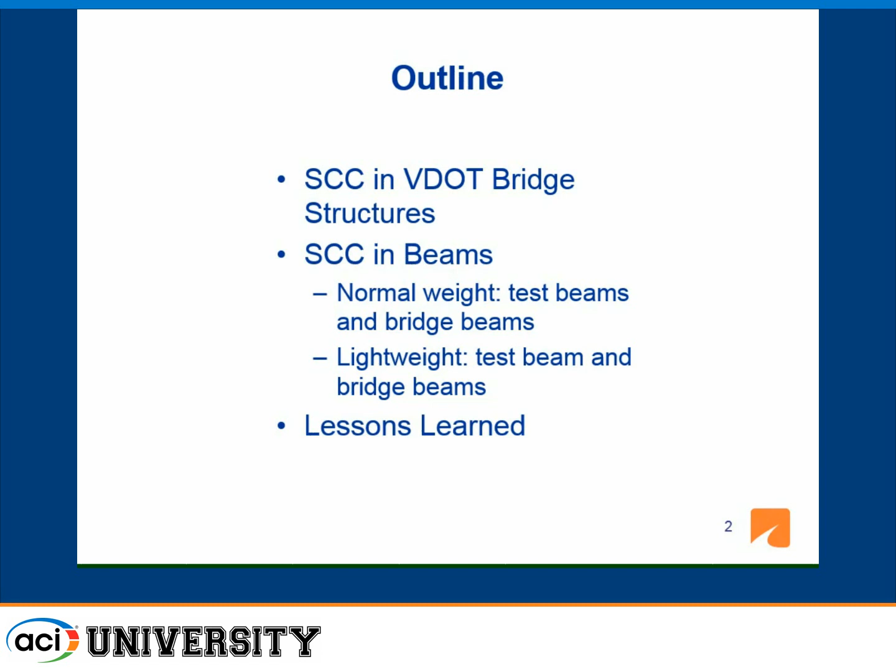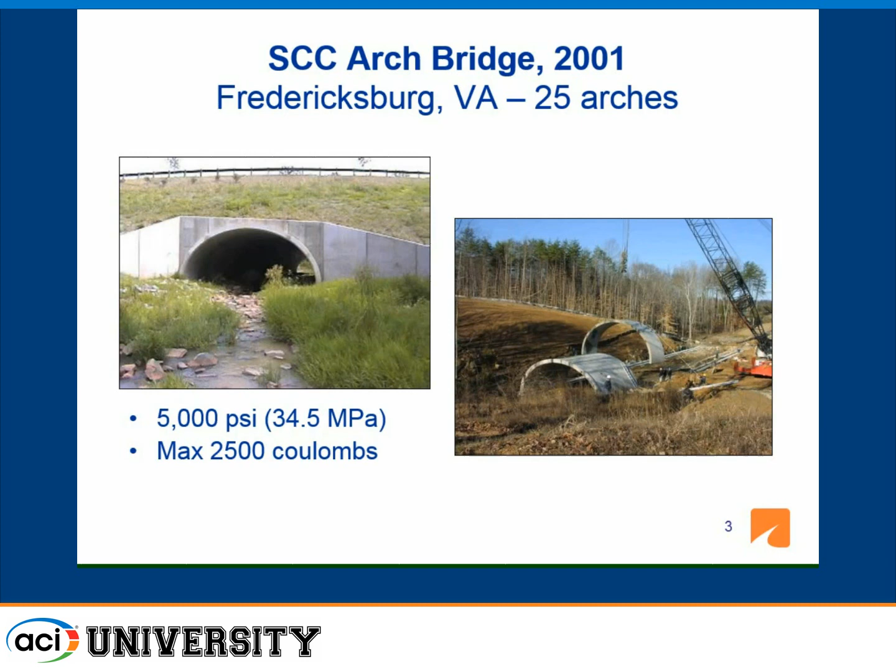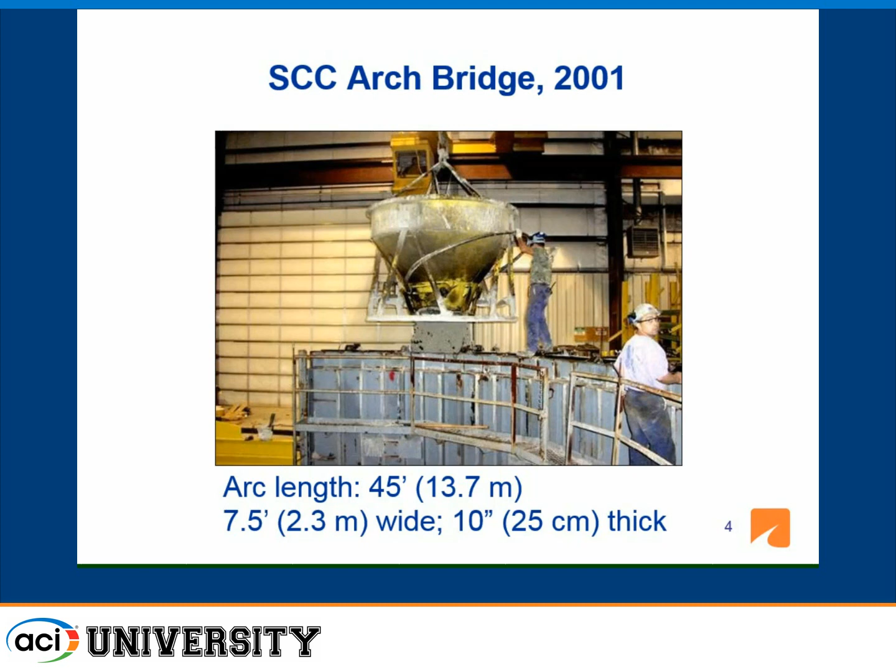The first structure we built, a bridge structure in Virginia, is this arch bridge, called the Bibo arch bridge. It had 5,000 psi strength and low permeability concrete. We made those arches by placing the form sideways, an arc length of 45 feet, and one person was able to place this whole arch in the plant. It was a very good application for us in 2001.

But what we saw in this first project was that we were getting sometimes surface blemishes like bug holes or sand streaks, and there was some slump flow variation. We also noticed that self-consolidating concrete is sensitive to materials - as Carolyn indicated, water sensitivity is important - and we needed good quality control. The sand streaks usually happen at higher workability, higher slump flows, and when we tried to reduce the slump flow, we ended up with bug holes on the surface. So we had to be careful.

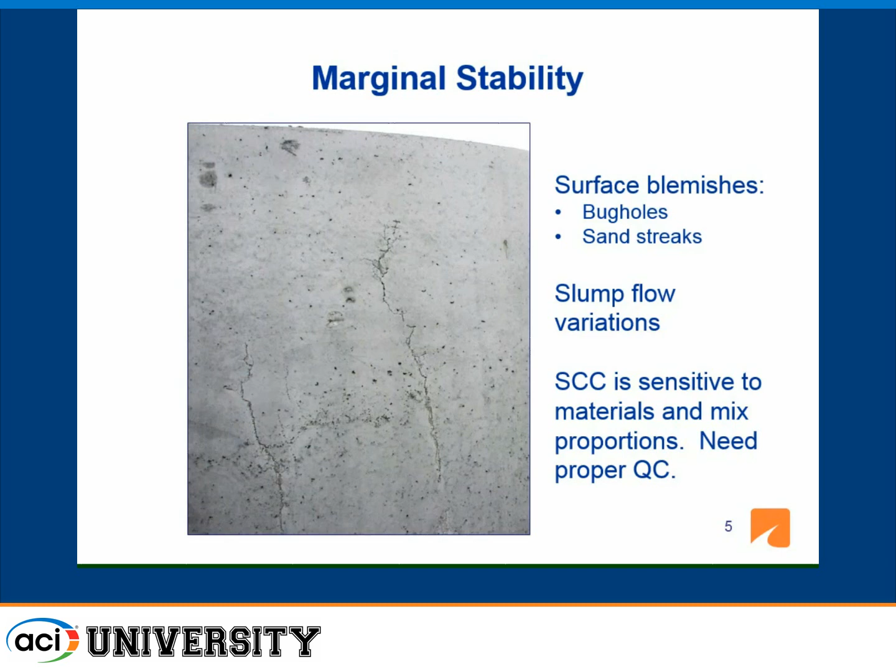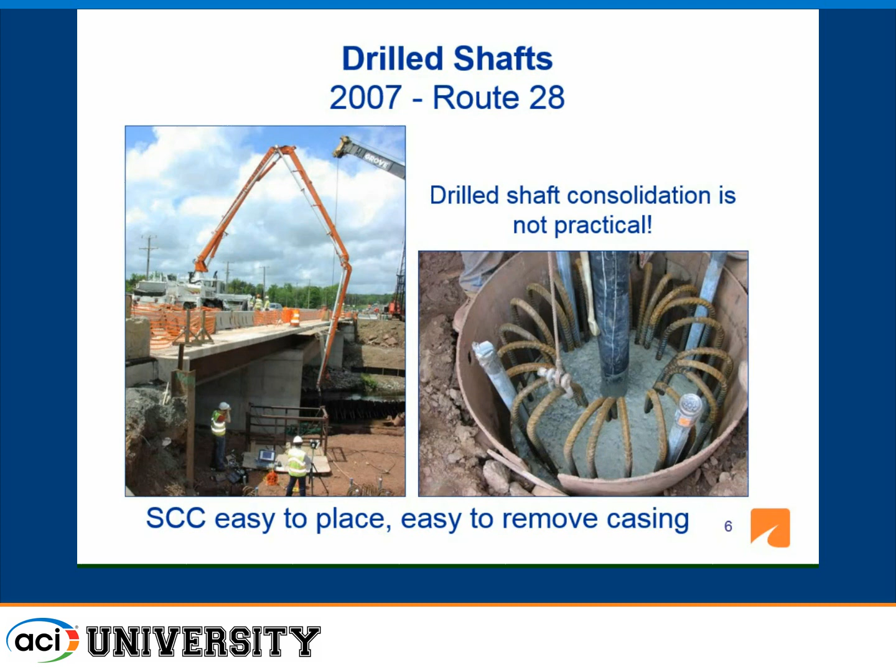Then in 2007, we placed SCC in drill shafts. As you know, these are deep holes, and it's not possible to consolidate concrete in drill shafts. What we noticed in this project was that self-consolidating concrete was very easy to place, and the contractor liked that he was able to remove the casing easily. Sometimes it's an issue to remove these casings - it gets stuck, so you pull the whole thing - so he was very happy about that, and we liked that as well.

After this project, we included self-consolidating concrete as a requirement in our drill shaft special provision. So now every drill shaft in Virginia is done with self-consolidating concrete.

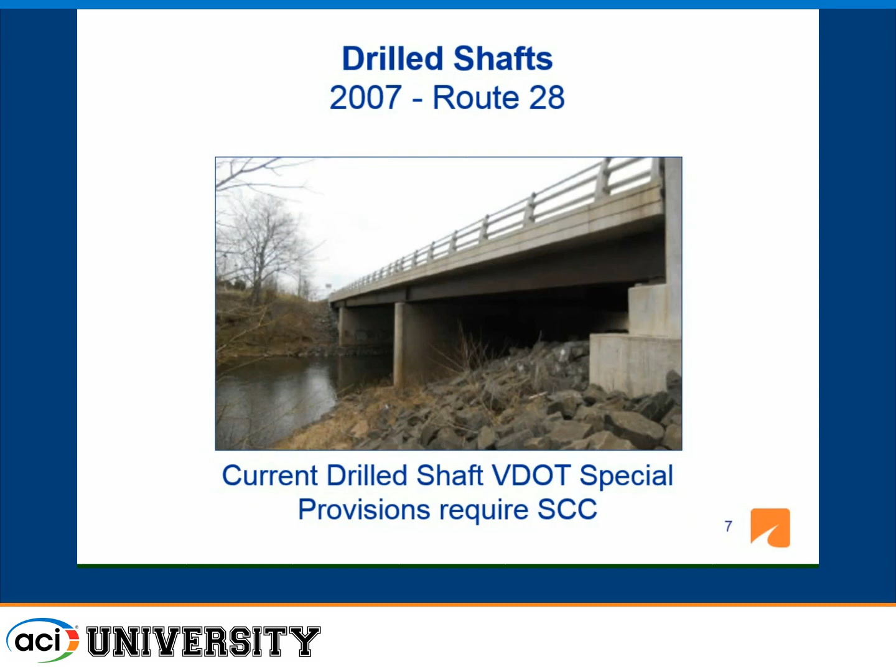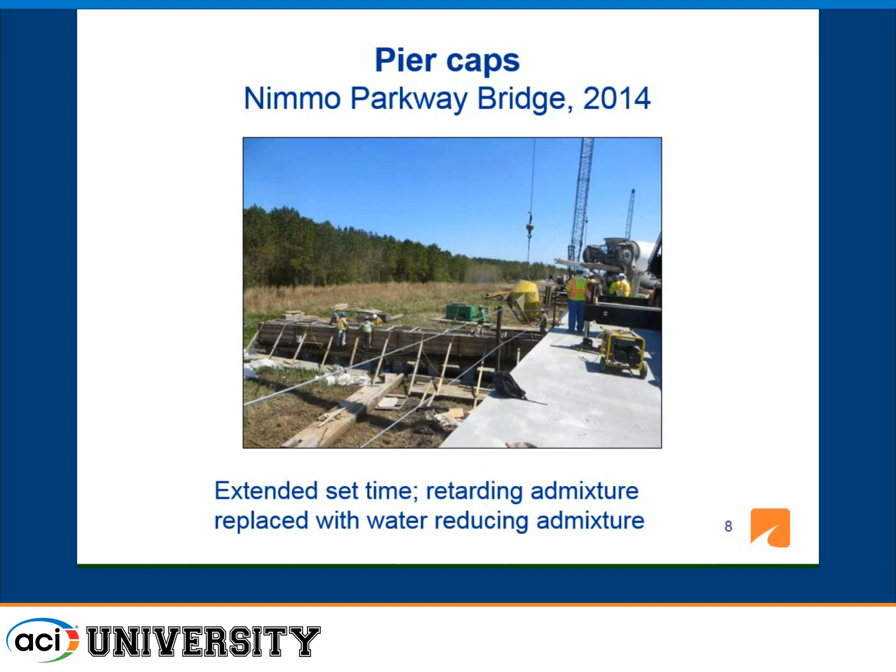We also placed SCC in pier caps in 2014. What we noticed here is that, with a ready-mix truck bringing concrete to the job site, they wanted a little bit more working time, so they put a retarding admixture into the mix. We noticed that this extended set time made the finishers very unhappy, so we took it out and used a regular water-reducing admixture, and then they were able to finish on time.

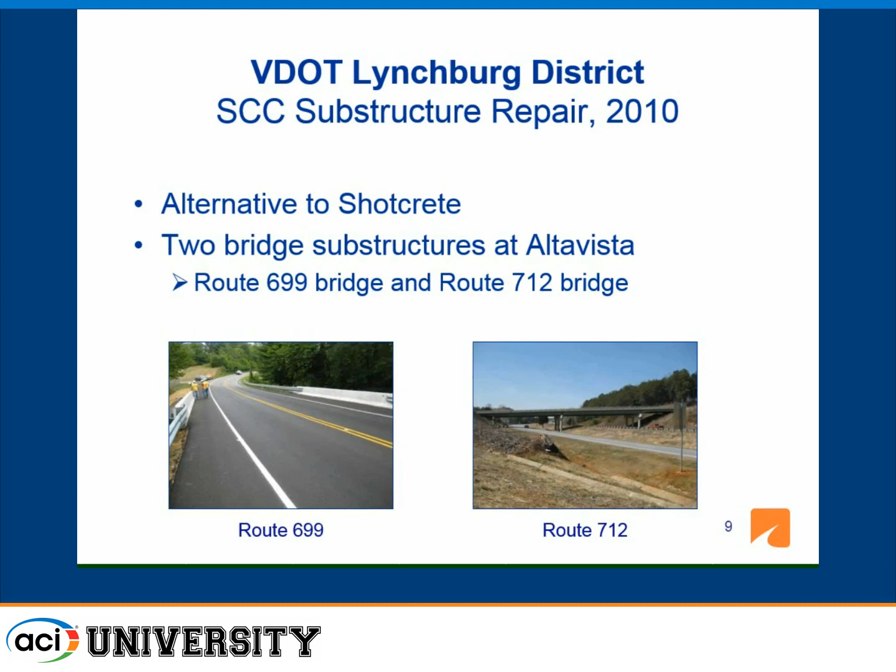Another good application for us in bridge structures is substructure repairs. We started this in 2010 as an alternative to shotcrete, and initially worked on two projects - one a pretty small bridge on Route 699, and the other on Route 712. This was our 2010 first experience, and the same ready-mix plant provided the concrete to both projects.

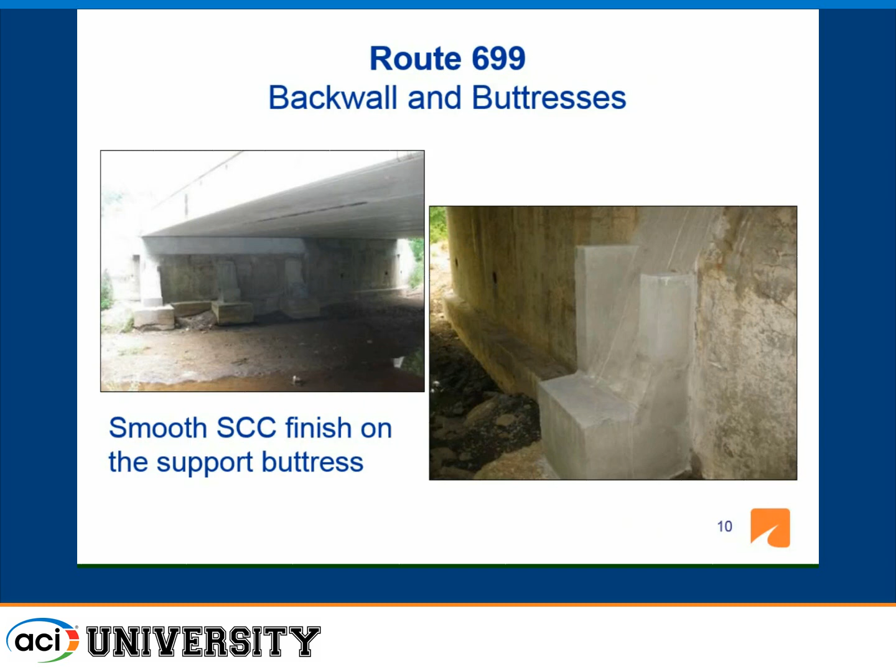This is the very first structure we did with bridge structure repair. What we noticed was very sharp corners in these support buttresses, and that was very interesting to people - a very good finish, like the other speakers were talking about.

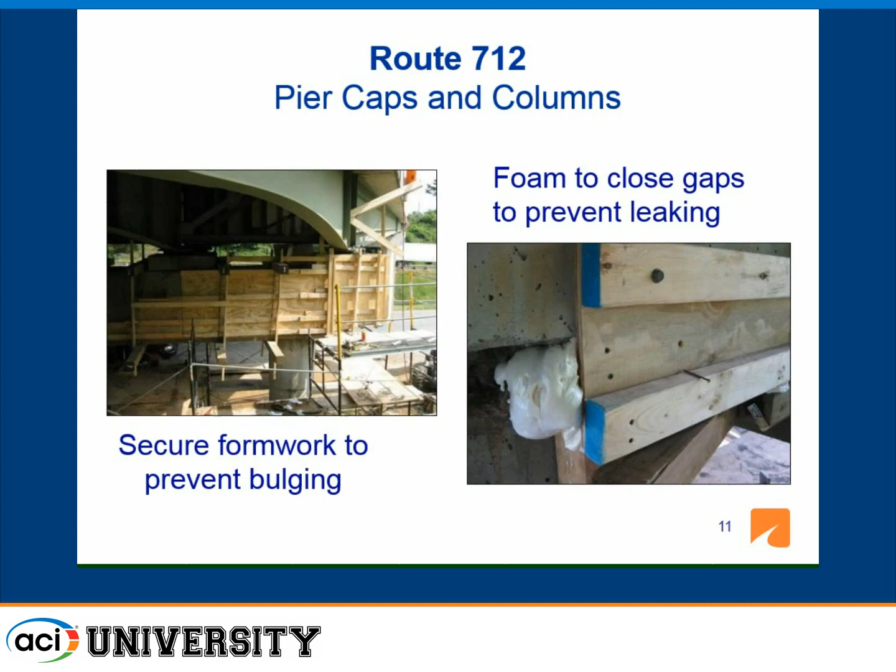Then we started doing the second bridge. Here what we noticed is the importance of securing the formwork to the structure, because we were having some bulging, so they tried to put more 2x4s and secure it better, firmly into the structure. Another thing we noticed is that we wanted to close all the little holes, because this material could easily run out. These were some little lessons we learned during these projects.

One other thing we noticed is that you need some kind of head to move this material. You can pump it, or use some simple system - this height provides some head for us to move the SCC. That turned out to be another important issue for us, needing head pressure. We've used different pumps, including a simple trailer pump to pump this SCC, so it's not a concern these days.

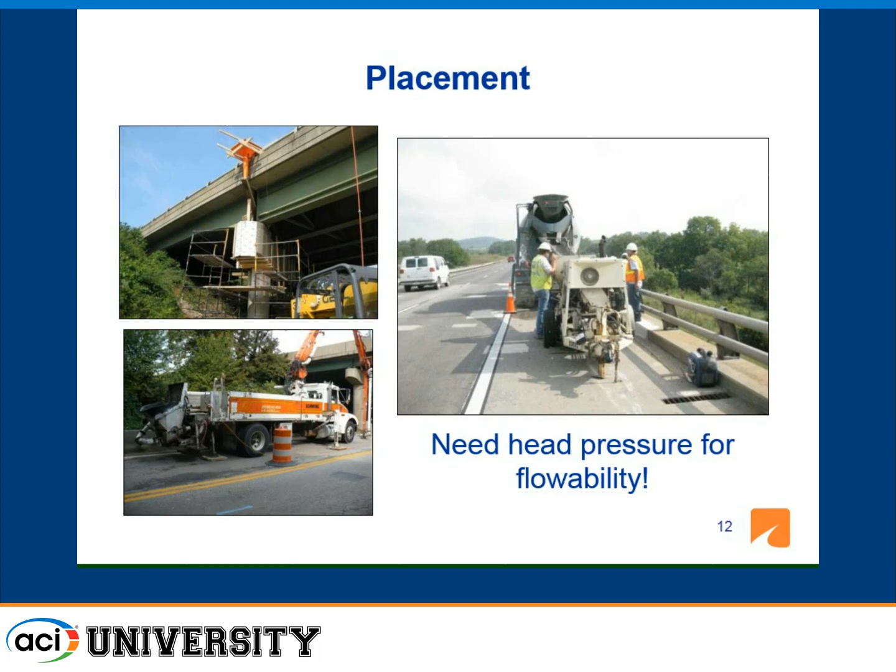One other thing we noticed in this project was that we need to maintain the flow of SCC during construction, because most of the time the ASTM test is done in the first 5-10 minutes, but what we're interested in is what happens to this concrete during construction. What we noticed in some of these early jobs is that they had to use a handheld vibrator to move this stiffening concrete.

So we did notice some slump loss, but later on we started using retarding admixtures or hydration stabilizers, or the workability retaining admixtures, to keep it SCC during construction. So that's what we emphasize these days.

It's okay to test early, you need that, but you also need to make sure that it is SCC during the job. So in some jobs, I tested it as the truck was leaving the project to make sure it was still SCC.

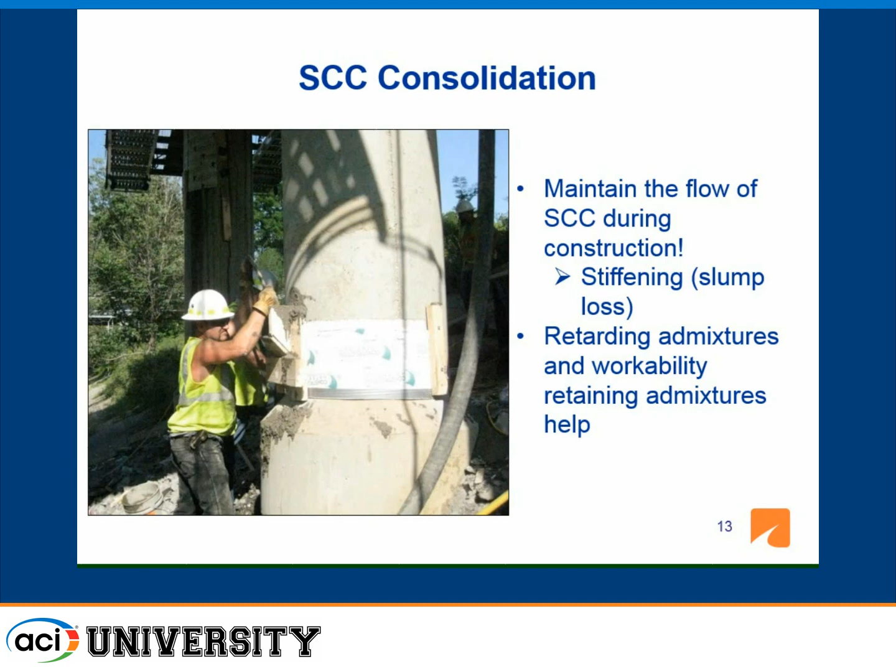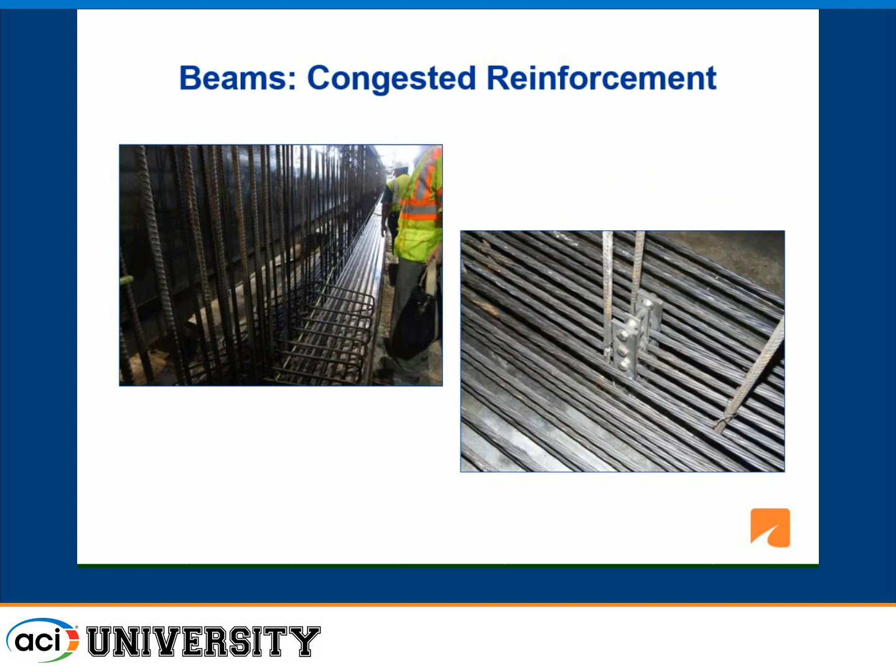Now let's come to the beams. The beams have congested reinforcement, as you see here, a lot of reinforcement in beams. So we like this concrete to flow easily because these are the things that we can see.

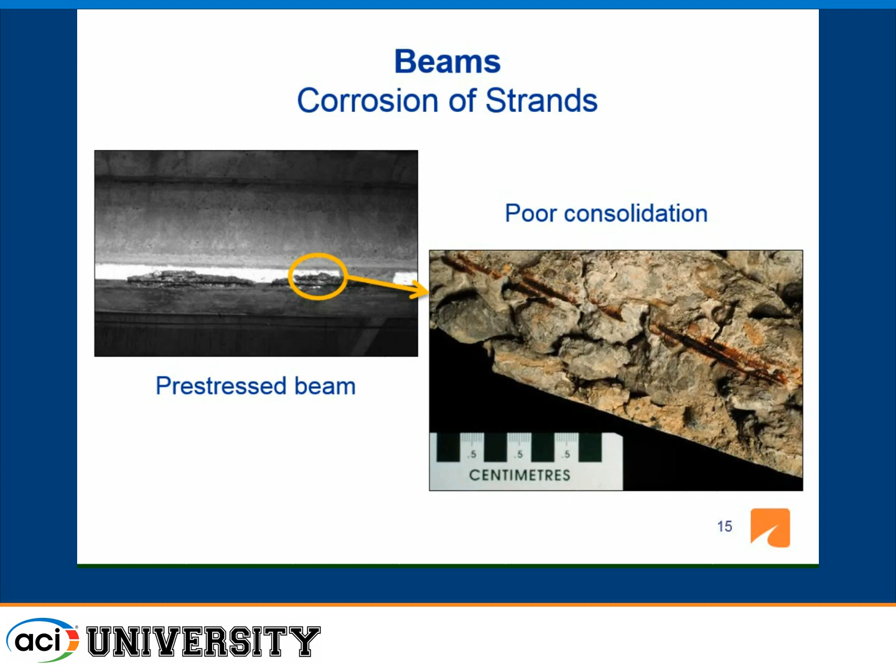It was so interesting that in this beam, probably a 70, 80-foot long beam, only in this section you had corrosion. Why? Because that's the area where you had the consolidation problem. The rest of the beam was in good shape because it probably had better consolidation.

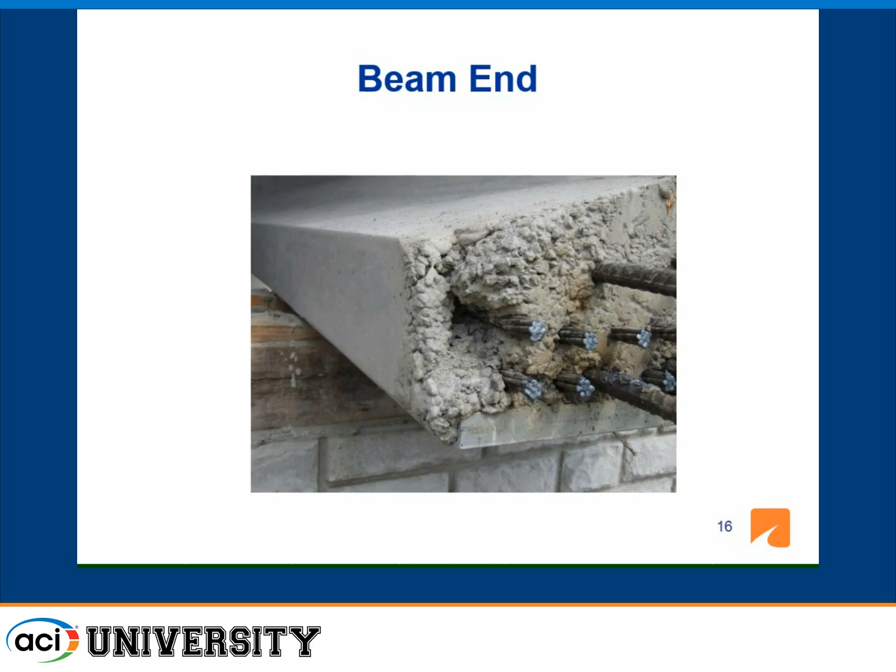Then another thing we see, for example, this is the end of the beam, and we are also seeing some consolidation problem right there with the regular concrete. So that makes us feel comfortable with self-consolidating concretes to fill those voids.

So what we did in 2003 was build test beams. This is a 45-inch deep beam, that kind of cross-section used in the real structure, and this is a 60-foot long beam. We wanted 8,000 psi minimum at 28-day strength and 1,500 coulomb as a maximum permeability number.

We took 2 beams to the Federal Highway Administration Structures Lab and tested them to make sure we did not have any problems, because some people were talking about bonding and other issues, but we never had any issue. These beams did very well in testing. So that made us feel comfortable.

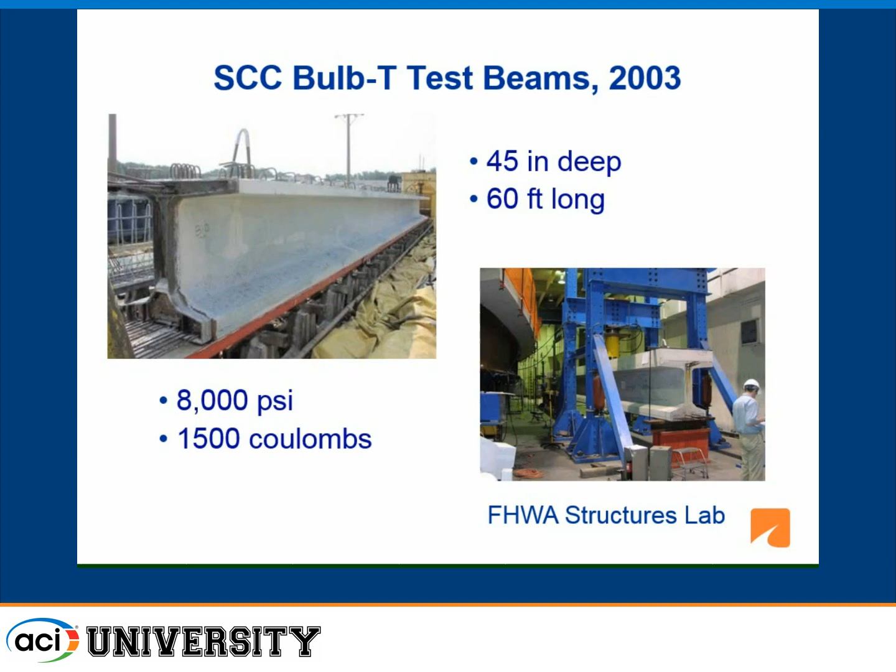So in 2005, we put 8 beams. We started with 8 beams, one span of this bridge, Route 33 bridge. It's a pretty long bridge, and for one span we said, let's try SCC.

Now it's very interesting to notice that these beams were well done, and the contractor - and we paid for it because it was a work order to put these 8 beams, which cost more to us - but then the producer liked it and did 32 more beams without any charge to the department. So they liked it.

Like you are saying, Carolyn, it can be a good thing. Cost is not an issue. So this was a good experience for us.

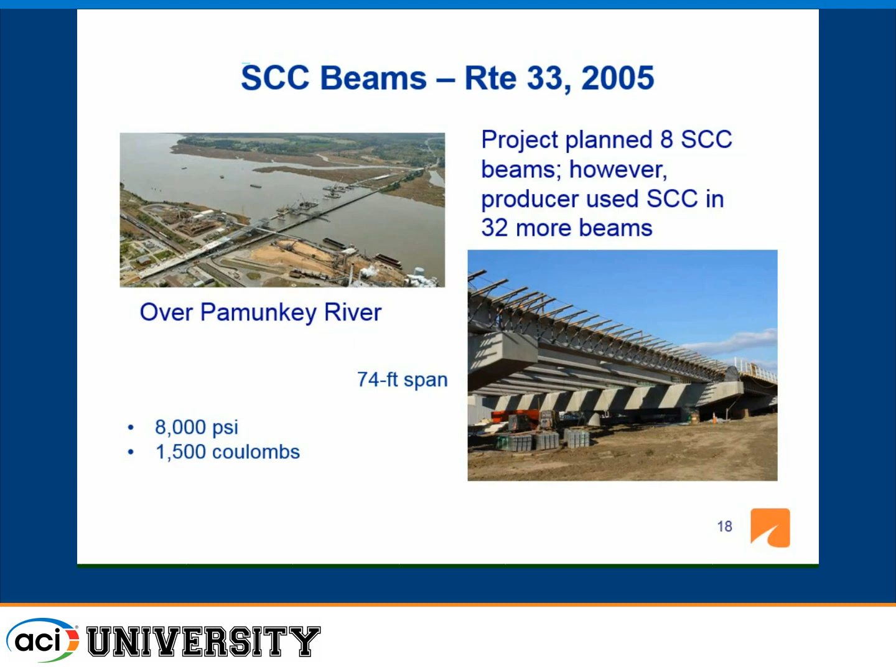Now let me tell you a little bit about the mixture proportions. As you see, regular SCCs usually have like 850 pounds of cementitious material. That's pretty common. Now my interest in some of this work is these eco SCCs, where you only have 530 pounds per cubic yard. That's what we will be discussing tomorrow in the session on SCC - please come for that.

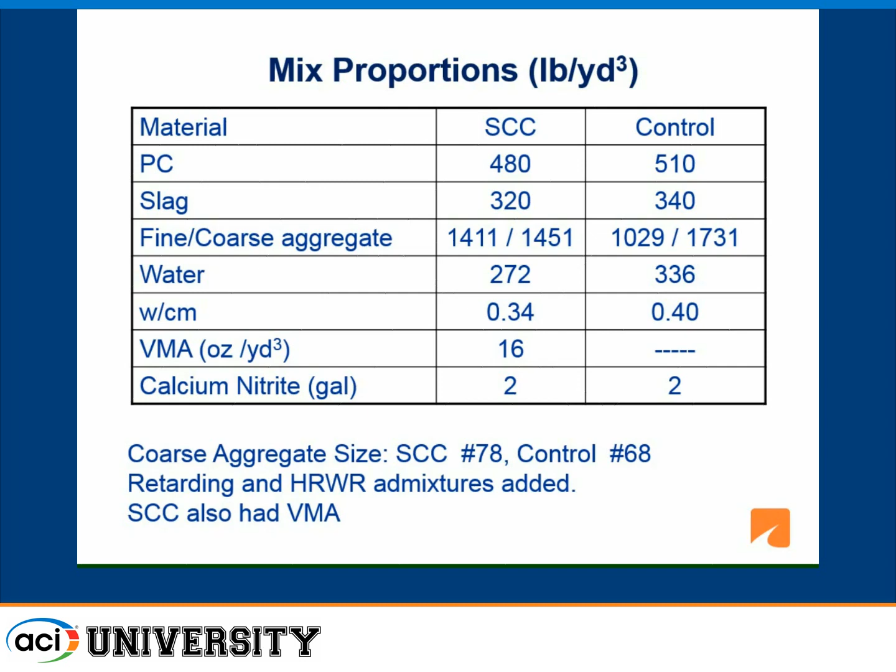Now the water-cement ratio is low, like it was shown before. And then we use smaller size coarse aggregate here, 3/8, and here, as you see, a 3/4 inch. So you use smaller aggregate in the SCC, easier to keep it stable.

Now what we noticed in this project - this again, 2005, one of our early projects - is that there were some slump variations. When we had a high slump flow, we were getting these frothy, small bubbles on the surface on top of the beams.

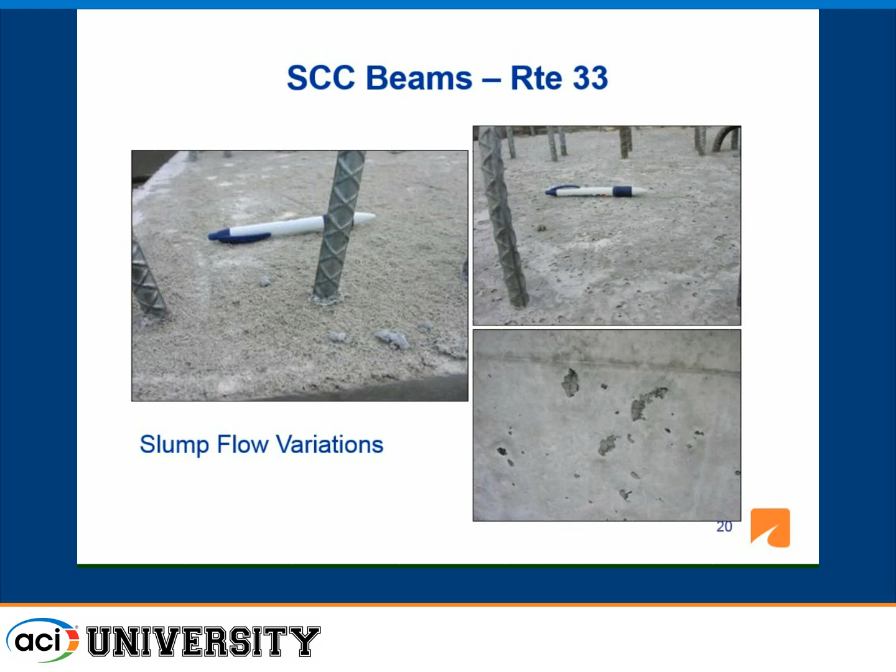But when we reduced the slump flow, it went to the other extreme, and then we were getting these bug holes. There's no frothy appearance on the top, but on the side of the beams we had more surface blemishes, these bug holes type of things. So you need to optimize and watch these things.

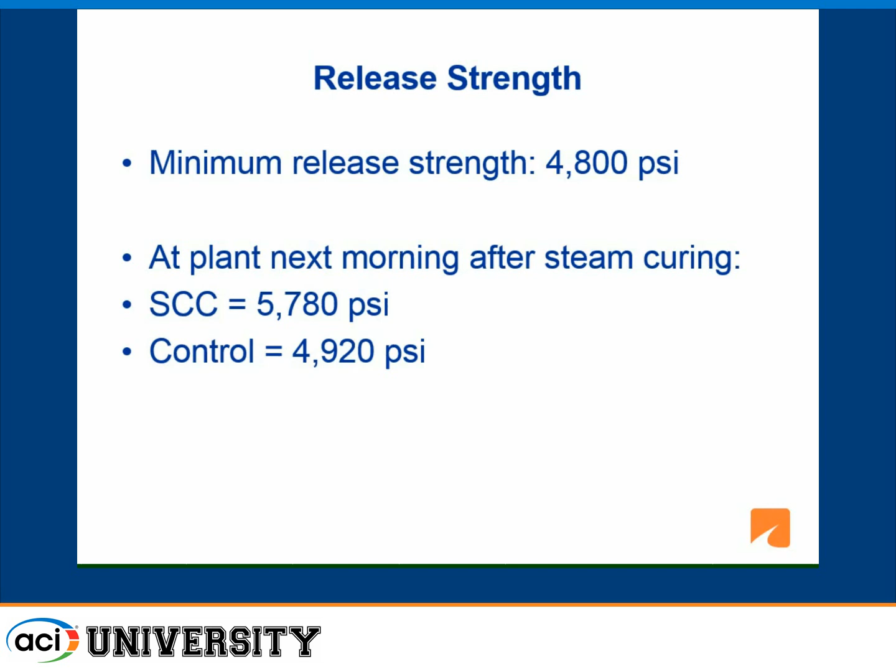The release strength for that particular project was 4,800 PSI. In these beams, we are interested in one-day strength. In this initial project, they went with 4,800 PSI release. In future projects, I'll tell you, 6,000 PSI was the release - so in one day we get 6,000 PSI, and SCC maintained that easily at that project.

Now when we look at the strengths, we got very good strengths because, as you know, it has a lower water-cement ratio than regular concrete. But when you look at the elastic modulus, even though it has higher strength, and people relate modulus to strength, the aggregates also play an important role. We had similar elastic modulus, but higher strength in the beams. And then the permeabilities were very low.

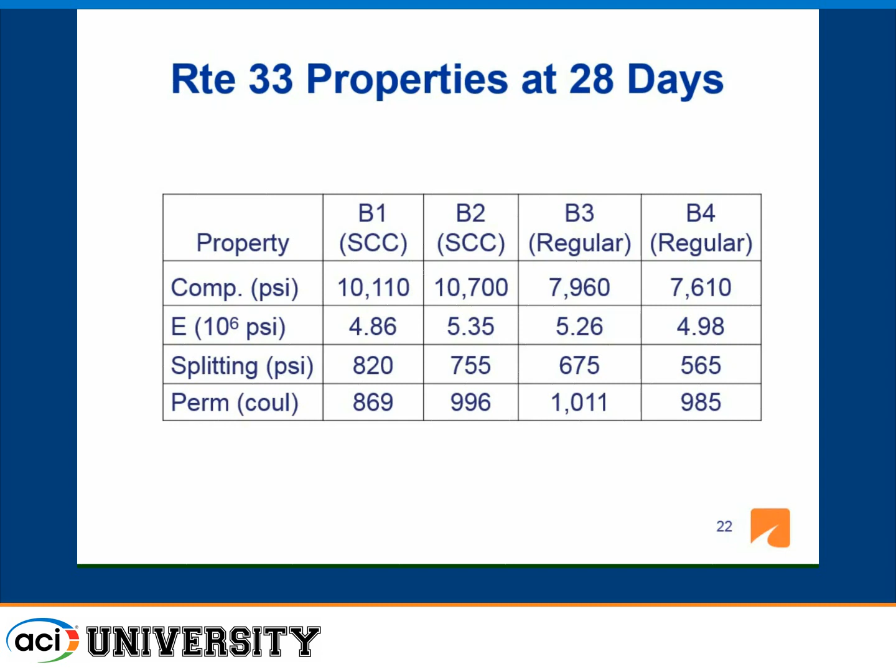You see that 1,000 and less is a very low permeability, so we don't have any problem.

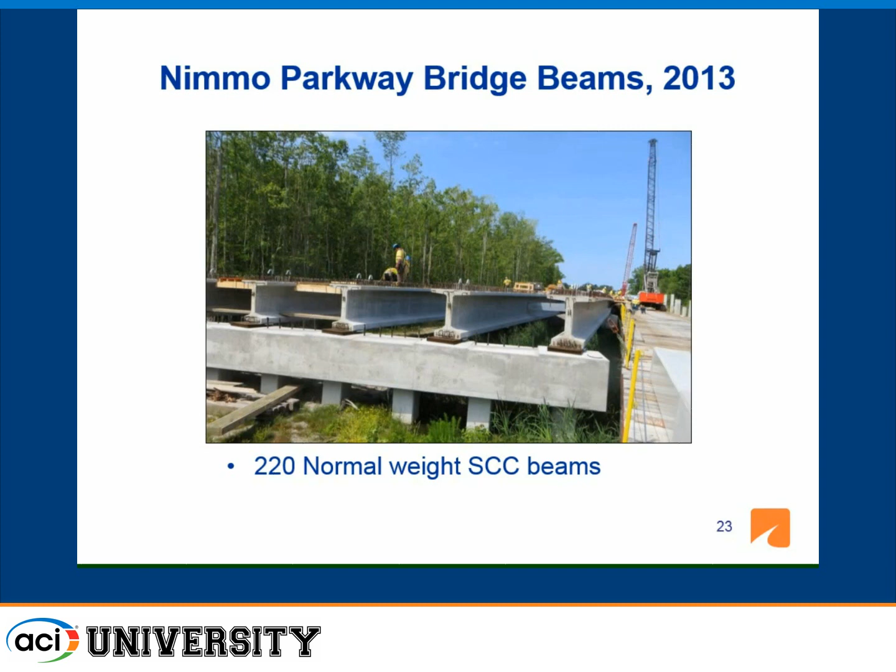Then in 2013 we made 220 normal weight SCC beams. In between, there were others done, but these are the ones I actually went and sampled and tested, here in this project in the eastern part of the state. Again, a pretty rich mix, 850 pounds of cement and a low water-cement ratio.

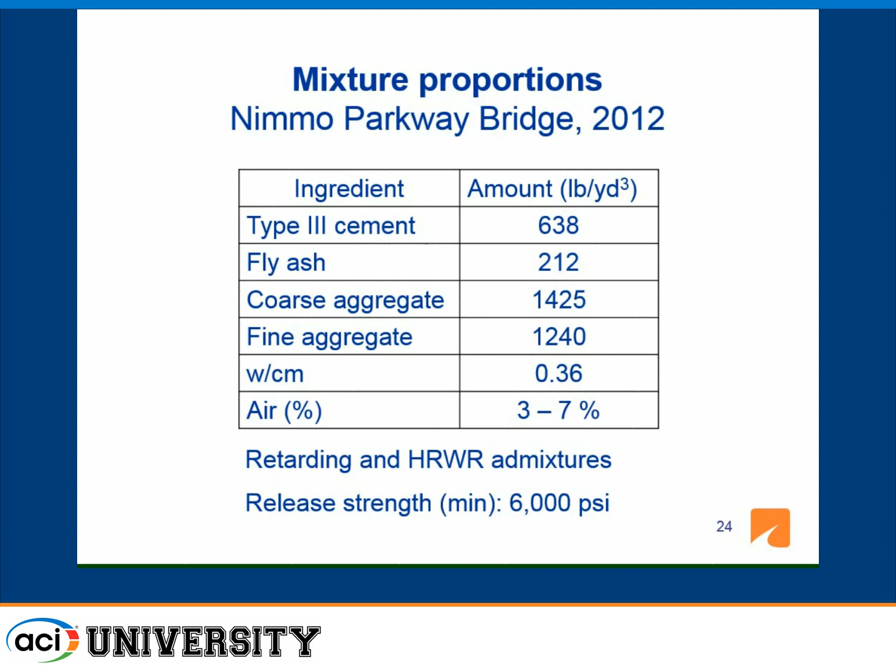Coarse aggregate and fine aggregate were pretty close to each other in proportions, and this one had a release strength of 6,000 PSI in one day. When we look at it, the surface was better in SCC versus the regular beams they were doing at the plant at that time with conventional workability.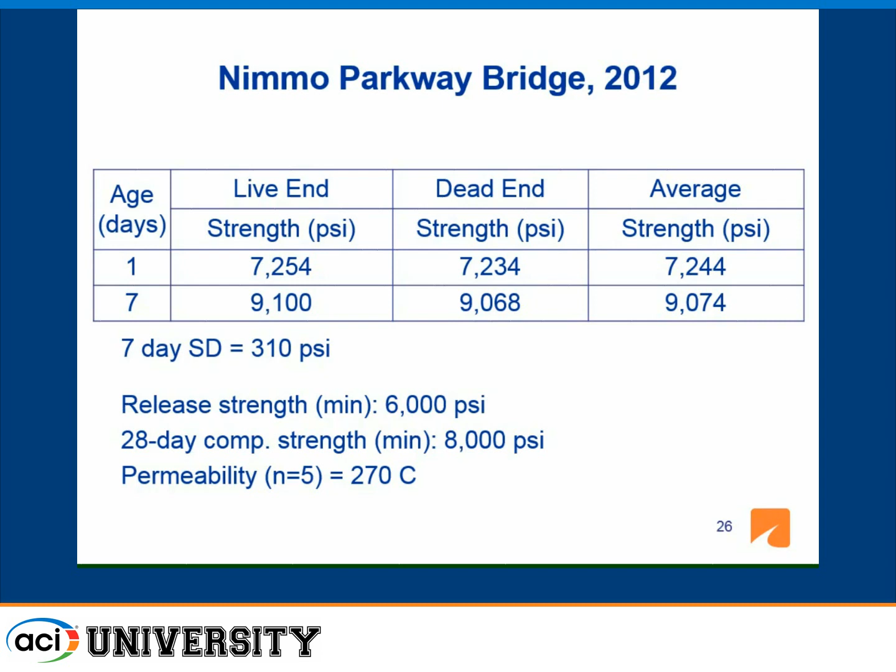Now let me tell you a little bit about the lightweight. In 2006, we started doing lightweight. Again, we tested a beam in a laboratory with very good results.

What we noticed when we were making this beam at the plant was that slump retention was an issue. We were losing slump fast. Again, these are many years ago. Now I'm sure we'll do better.

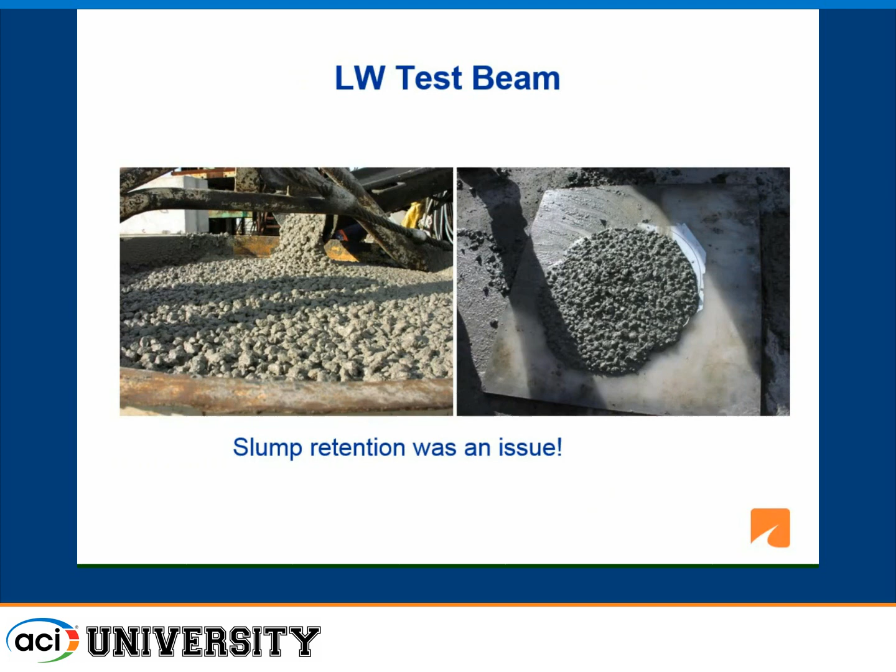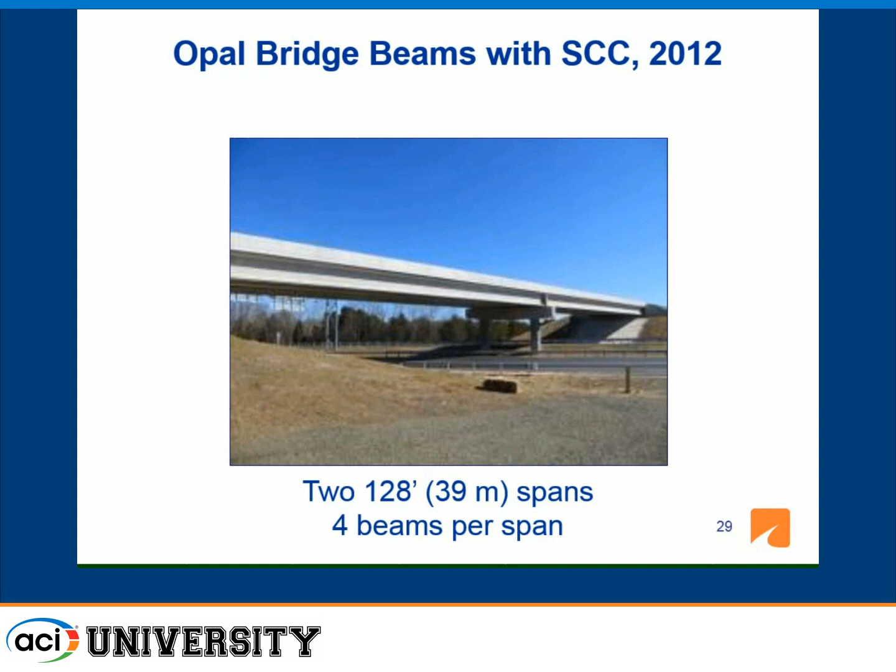Now we did a bridge in 2012 to use this self-consolidating lightweight concrete, with 128-foot spans, 4 beams per span. When we look at it, it's a very nice workable concrete, and I hope you'll like this look of this lightweight concrete.

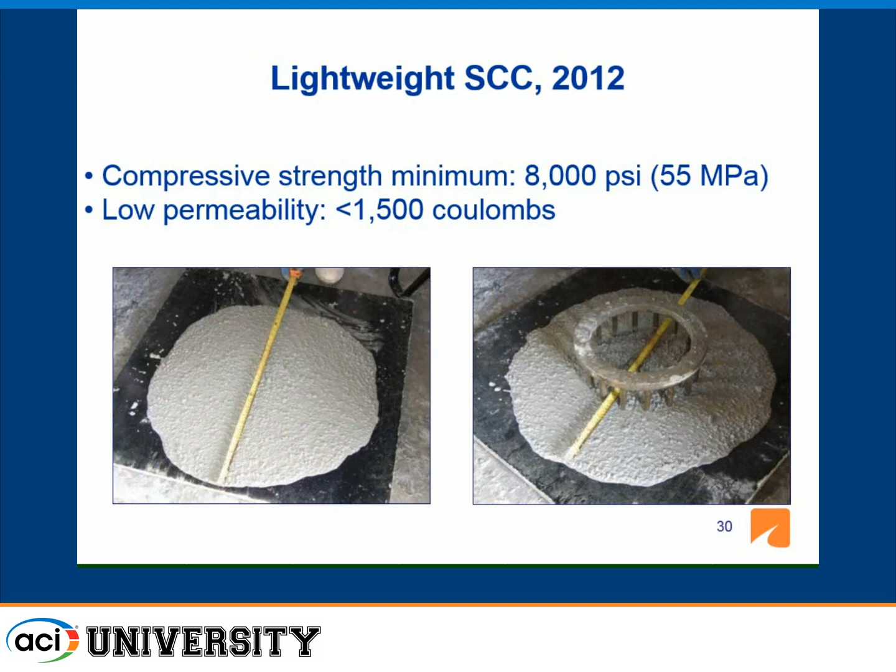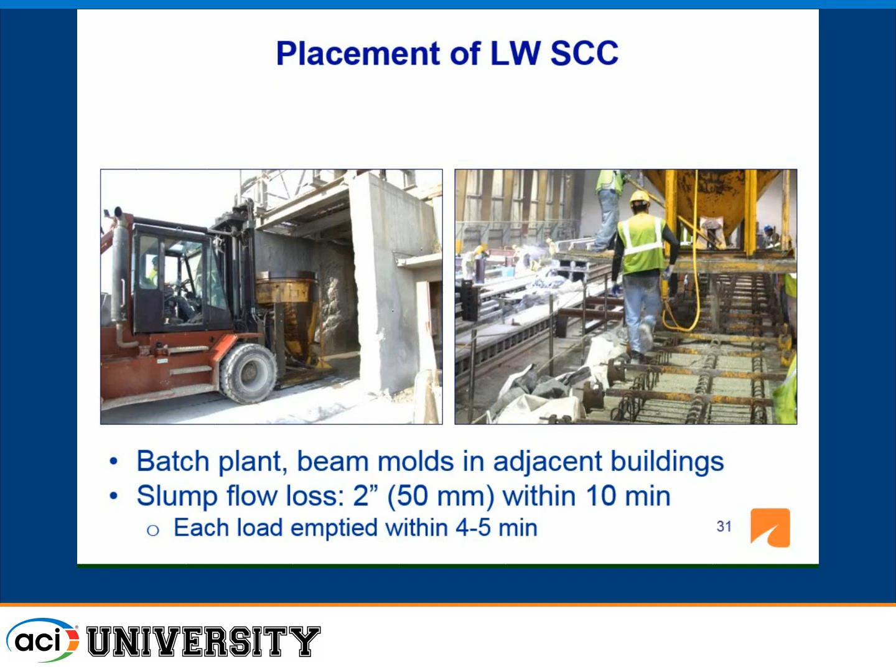As I told you, we were having slump loss issues and slump retention problems, but in this project, the batch plant and beam molds were adjacent to each other, so we were able to empty this into the beam in 4 to 5 minutes. That worked well. So either you use admixture, or you work with time issues. We had no problems.

But what we did is, especially on the surface, to make it flow easier because we don't have much head pressure there, they used internal vibrators, and to keep the surfaces free of blemishes, or minimal blemishes, they did a little bit of external vibrating, but very like 1 to 2 seconds type of thing.

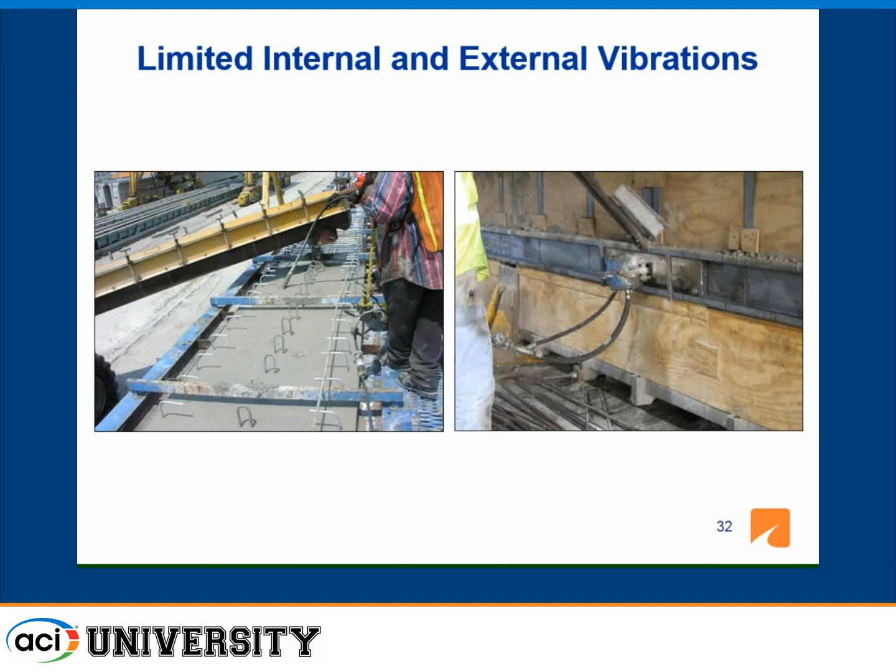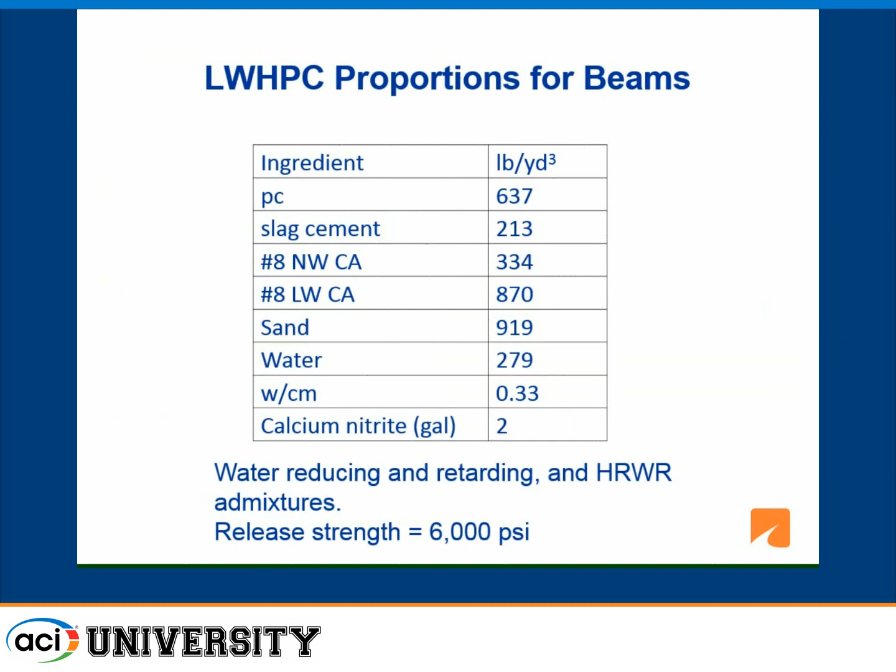Now when you look at the mix design, again it's a pretty rich mix with a very low water-cement ratio and 6,000 psi. This is a lightweight SCC with a 6,000 psi release strength, as you see.

What we noticed is that the average 28-day strength of the lightweight concrete, so please pay attention to that, is almost 10,000 to 11,000 psi in that product. It was very well done, a very good product, and the permeability is less than 1,000 coulombs. So this is a beautiful bridge, beautiful beams in that particular bridge.

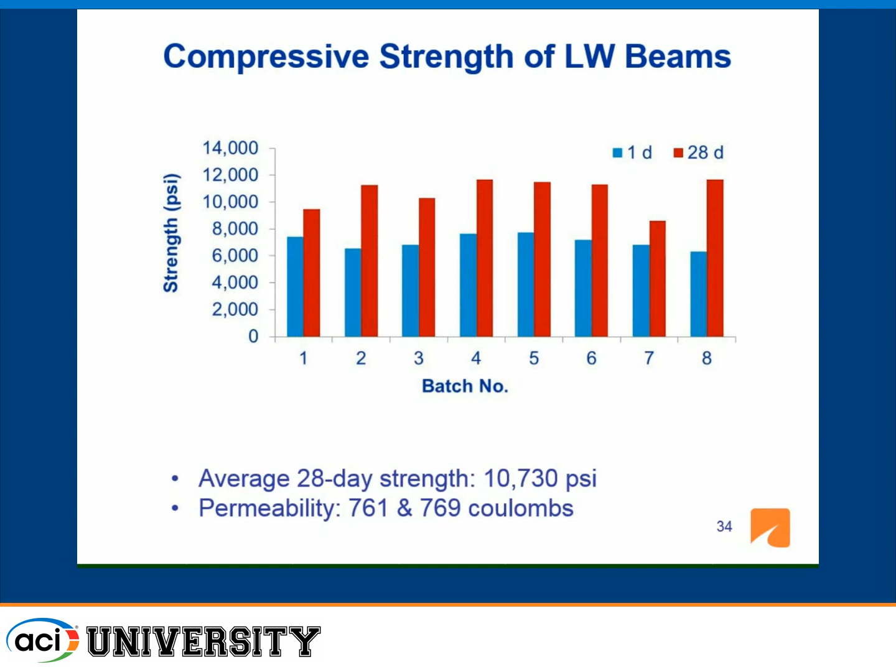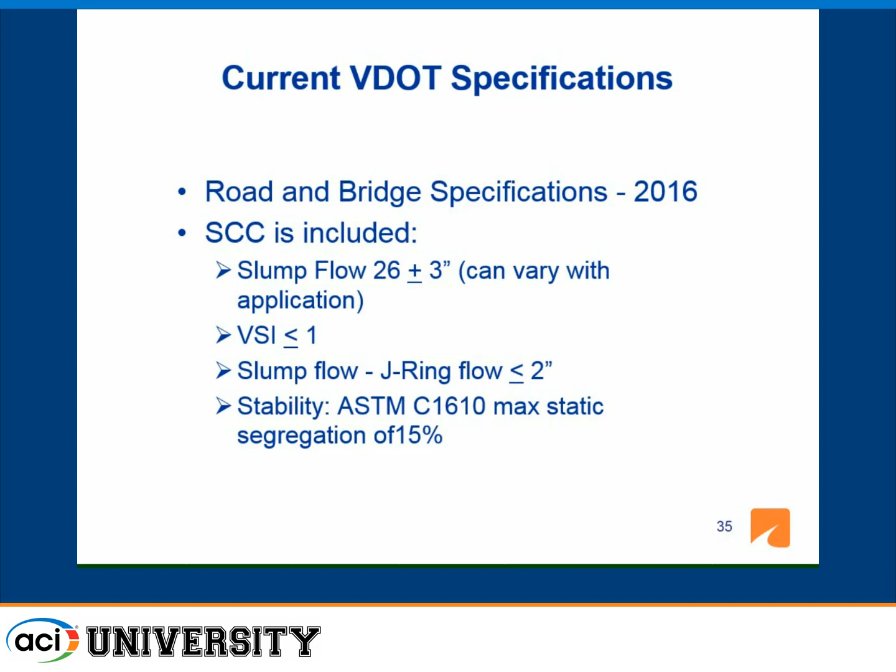As a conclusion, we are doing self-consolidating concrete with high workability, satisfactory strength, and permeability using normal weight and lightweight aggregates. But we are noticing that SCC is sensitive to materials, like the water and mixture proportions, and slump loss can occur, so flow characteristics can be maintained during construction through workability-retaining and retarding admixtures.

This is a very important issue for us, not only what you do in the first 5-10 minutes, but to see that it remains SCC during the whole production. We like stable mixes, and we can do that with proper mix design, having sufficient fines, as was mentioned, and using viscosity modifying admixtures.

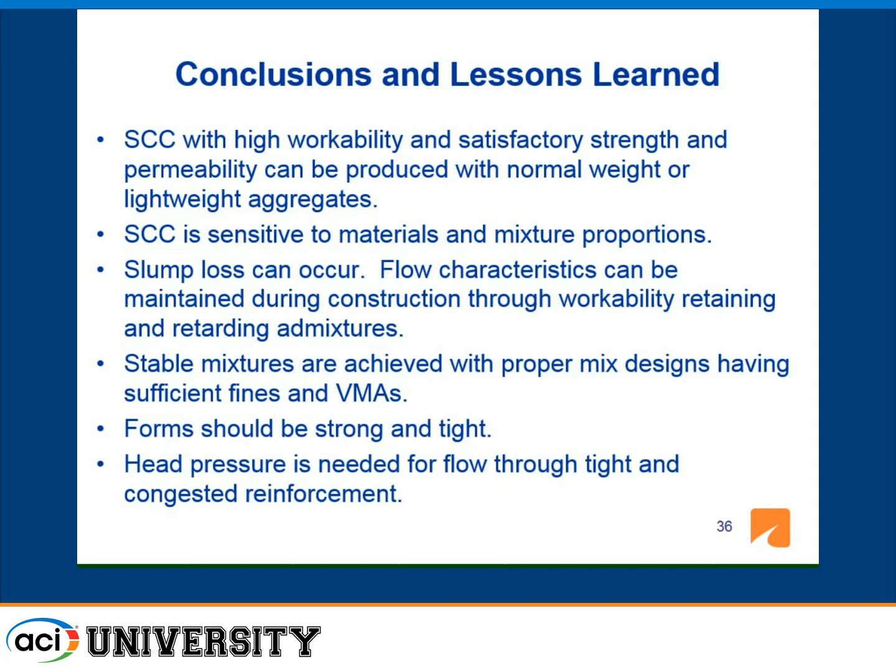We noticed that forms should be strong and tight. Fortunately, in beams they use metal steel forms, which are pretty sturdy, so we don't have any problem with the beam production. But in other work, we do pay attention, and head pressure is needed for flow through tight and congested reinforcement.